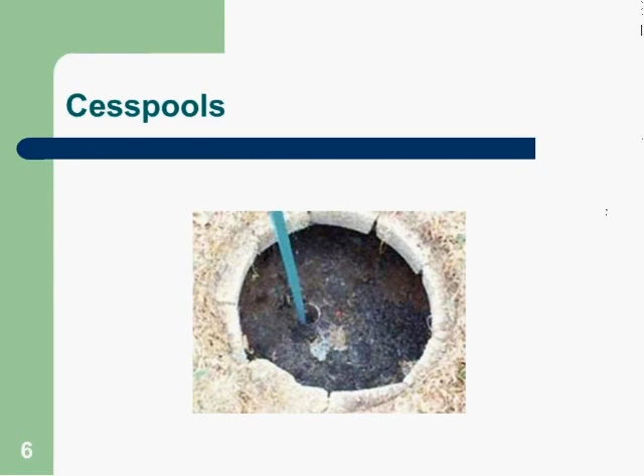First, we will discuss the cesspool issue. The rules at 3.16, Other Sanitary Sewage Disposal Units, address the cesspool issue. Cesspools are not systems. Cesspools are units that receive untreated sewage that allows a direct discharge to the environment.

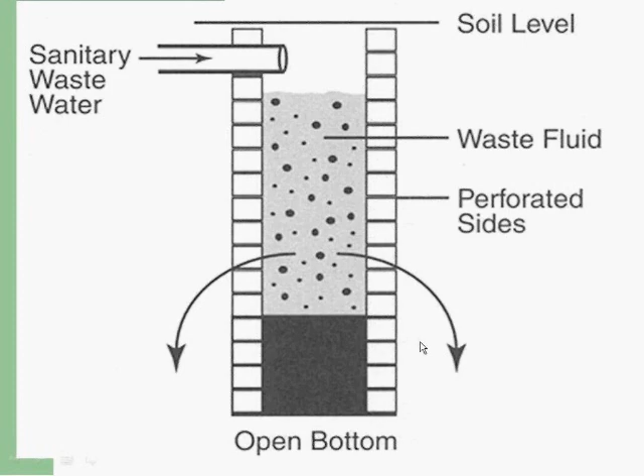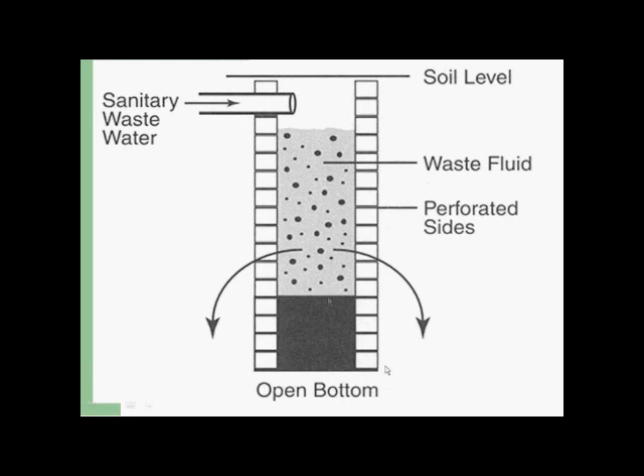Here is a picture of a cesspool for you to review. Cesspools were banned from new construction in New Jersey due to their negative impact on the environment on July 1, 1978. As you can see, the cesspool takes sewage directly from the home into a pit with open joints where the solids settle and the untreated sewage discharges into the environment.

Systems have at least primary treatment, typically a septic tank, prior to discharging. In this picture you can see there is a septic tank followed by a disposal field where water filters through the soil and then makes its way to the groundwater table.

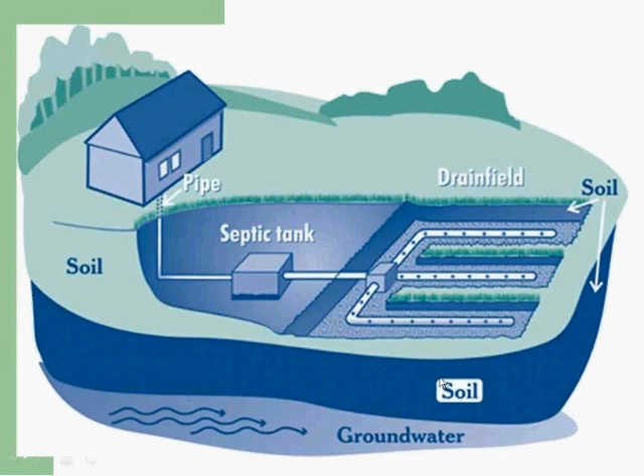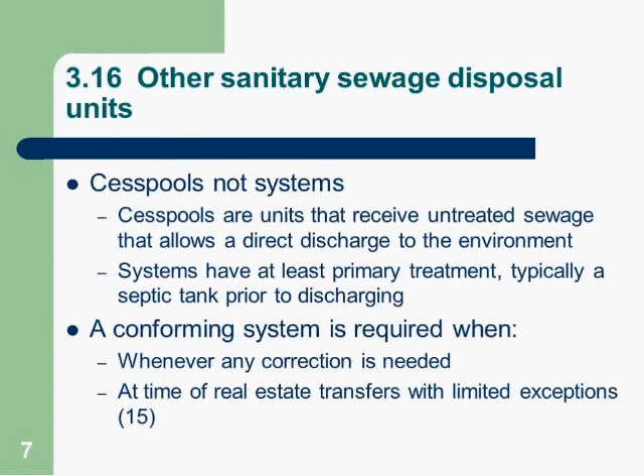A conforming system is required whenever any correction is needed to a cesspool, and at the time of real estate transfers, with limited exceptions. There are 15 of those exceptions, and we'll be discussing each one as they appear in the rule. The first is a conveyance for a consideration of less than $100.

Second, a conveyance by or to the United States of America, the state of New Jersey, or any instrumentality, agency, or subdivision thereof. A conveyance encumbering realty or providing for the modification, release, or discharge of a debt, obligation, or encumbrance, or the foreclosure of a mortgage or lien, or sheriff and execution sales.

A deed which confirms or corrects a deed previously recorded, a sale for delinquent taxes or assessments, and the foreclosure of same.

Judicial proceedings affecting interest in real estate and documents filed in connection thereto.

A conveyance by a receiver, trustee in bankruptcy, or liquidation, or assignee for the benefit of creditors; a deed eligible to be recorded as an ancient deed pursuant to the law; a deed or map that memorializes subdivisions of land.

Or which creates or affects easements or restrictions or other burdens upon title; a conveyance between family members or former spouses; execution of a lease or license; in specific performance of final judgment; a deed releasing a right of reversion.

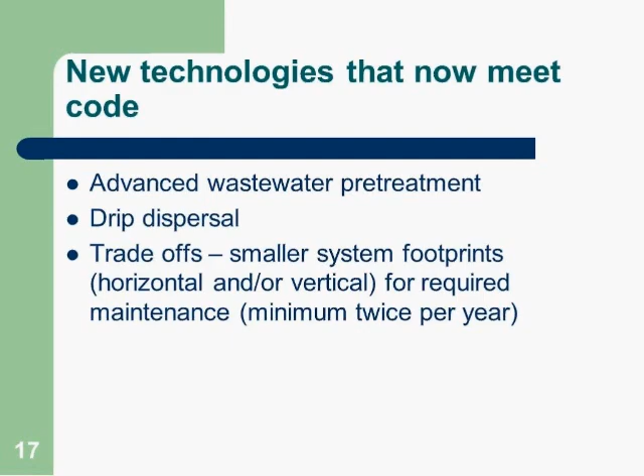However, all of these systems require maintenance at a minimum of twice per year for the first two years, and at least once annually thereafter. Depending upon the complexity of the system, more than the minimum service requirements may be required.

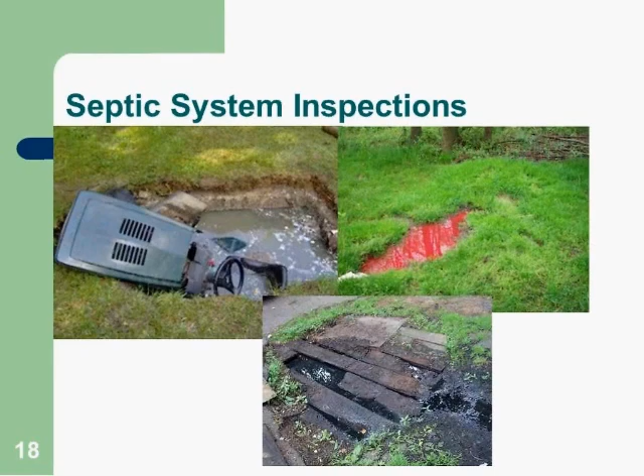The next issue we'll discuss is septic system inspections. This is addressed in 12.6 of the rule, inspections during real property transactions. These inspections are not mandatory under the rule; however, it is the state standard for doing these inspections.

As the state standard, anything else must be defendable as to why the minimum requirements of the state standard weren't met. The administrator gets a copy of every inspection. Their response is only required when a report identifies a condition listed in the Health Department reporting section on page 4 of the form. A copy of the inspection form is required to the administrative authority within 10 business days.

However, if one of those conditions on page 4, which represents a potential malfunctioning system, it must be reported within 24 hours. The protocol identifies that any problems are negotiated between parties. There is no obligation of the administrative authority, other than issuing permits required for any work done to the systems. At this point, all parties should have the information necessary to properly negotiate the transaction.

So when must an inspection follow the standard? This is required, including but not limited to, when an inspection is required by a law or rule, if a law is adopted to require the inspection of systems in the future, or if there's an existing law, such as a financing law, that requires the use of state requirements, you must follow the standard. If there is a local ordinance that's been adopted by the local Board of Health, you must follow those local ordinance requirements when you're in that jurisdiction.

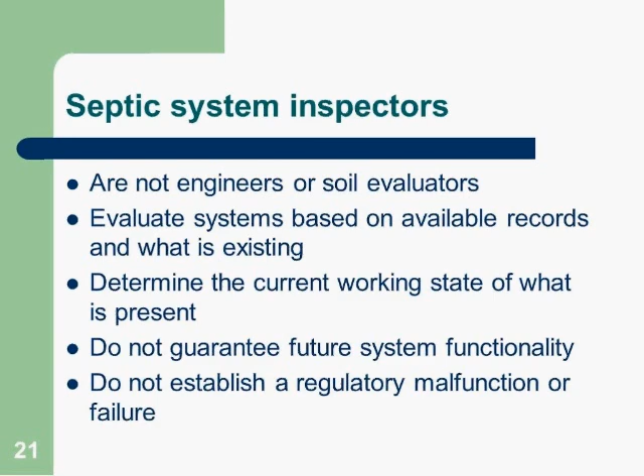The septic system inspection protocol has existed since 2003. The protocol has been published guidance in New Jersey, but is based upon a Pennsylvania Septic Management Association inspection criteria that was established in 1989. It is a professional standard recognized by the state.

If it doesn't follow the minimum requirements of the protocol, it is not an inspection as defined by New Jersey rule.

New Jersey One Call is New Jersey law. It protects the utility, the water, the phone, and the cable systems, and human health from accidental electrocution or gas line explosions and other hazards associated with working around subsurface utilities. That is why New Jersey One Call is required.

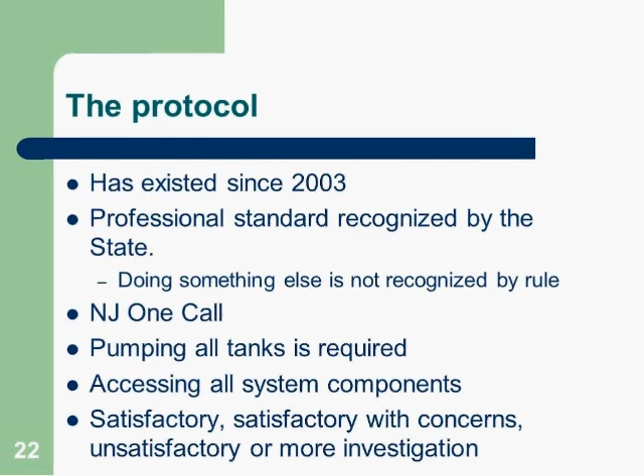Pumping all tanks is required as part of every inspection. You cannot inspect a tank below the liquid level without pumping. For example, here is a picture of a septic tank. There is no way for someone to see beneath the scum, the wastewater level, or to the sludge to determine if the bottom of the tank has been compromised or cracked, or the sidewalls below those liquid levels, without pumping those tanks first.

The protocol is in Appendix E. Specifically, Condition 4J requires all tanks be pumped in order to consider the inspection complete. However, when the tanks get pumped depends upon observations at the time of the inspections. In some conditions, you don't pump the tanks right away so that others may observe the problems associated with the tank.

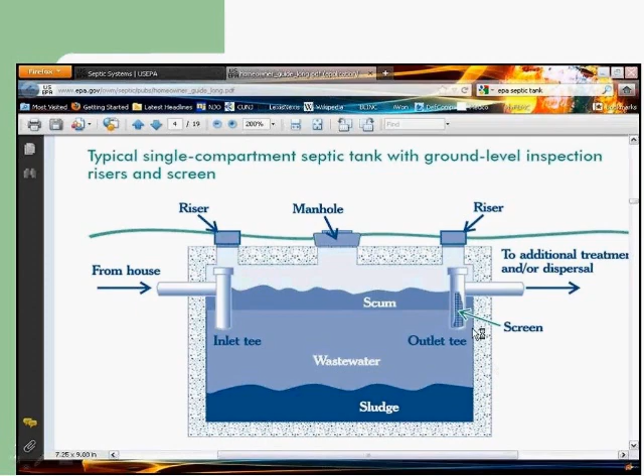So what is the health department role during these inspections? They are there to receive copies of all inspection reports. Again, this is required by the standard. Any report of a problem identified on page 4 of the inspection report results in the same response as they would any other report of a potential malfunction.

That does not mean they must visit the site. They follow their standard operating procedures, how they would if they received a phone call or a complaint from a neighbor regarding a potentially malfunctioning system.

Any repair or alteration to the system must be properly permitted by the administrative authority. You cannot do any work to a system without a permit. If a malfunction is confirmed by the administrative authority, the system must be repaired or altered.

A conforming system upgrade is required if it is possible. If documented that no conforming system is possible, the authority may allow a non-conforming upgrade. If no reasonable system is possible, holding tanks are required.

Malfunctions that are identified by these inspections include ponding or breakout of sewage or effluent on the ground surface, sewage or effluent seeping into buildings, backup of sewage into the building that is not a physical blockage of the plumbing, or leakage of watertight system components such as the septic tank or a distribution box or a pump tank.

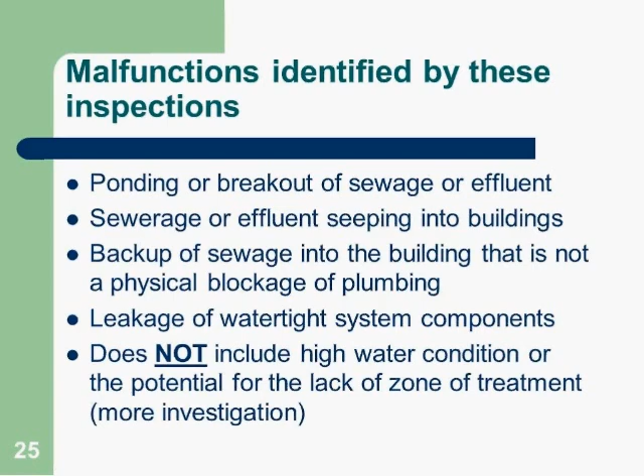That concludes our presentation. Now we will address the questions that were previously submitted to the New Jersey Association of Realtors and given to the department ahead of time to address.

Question 1: How can the property owner comply with the new requirement to upgrade from cesspools where a prohibition exists in other laws or regulations, such as in the Highlands or Pinelands, or in close proximity to C1 waterways? Question 1 and question 2 have a very similar answer. Question 2: Is there an exemption for historical properties, such as those over 100 years old, located in environmentally sensitive areas? For example, how do you upgrade a cesspool where the DEP's own regulations prohibit any soil disturbance?

In response to questions 1 and 2, the department rules have exemptions or methods of permitting the upgrading of on-site wastewater disposal systems, especially when dealing with a repair or alteration to correct an existing malfunctioning system or upgrading a cesspool. Expansion of flow would be prohibited, and changes of use may be severely limited. However, continued use of an existing structure is often allowable.

This may require the use of alternative or advanced treatment technologies that can be located inside structures to minimize soil disturbance outside. Drip dispersal systems, where there is no fill brought onto the site, are often options in these cases. A holding tank is the least desired and last option we consider.

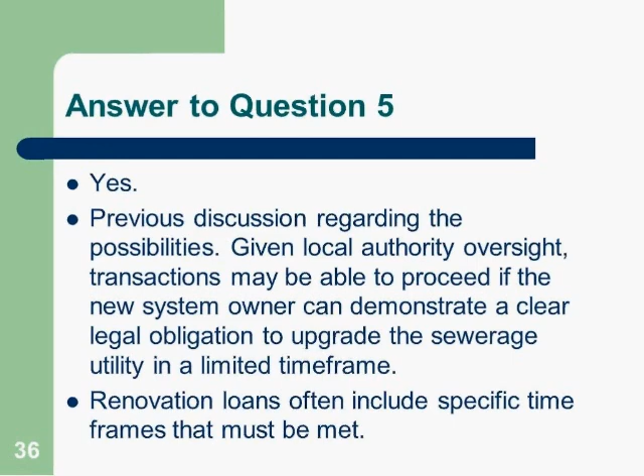Question 6: Regarding foreclosures and short sales within the state, if a passing septic system inspection cannot be obtained for mortgages, are the banks planning on cooperating with state-mandated repairs? Do we have a system in place to demonstrate to the banks the need for their cooperation?

Corrections are only mandated when there is a regulatory malfunction or if there is a cesspool. Unsatisfactory conditions or concerns beyond a regulatory malfunction are subject to negotiation between buyer and seller. With a regulatory compliant inspection, the parties will have all the information necessary to properly negotiate the transaction. Again, this is similar to a 15-year roof on a 17-year-old house.

There is no system in place with the banks. As before, they decide what to finance and what not to finance. The department has no control over that issue.

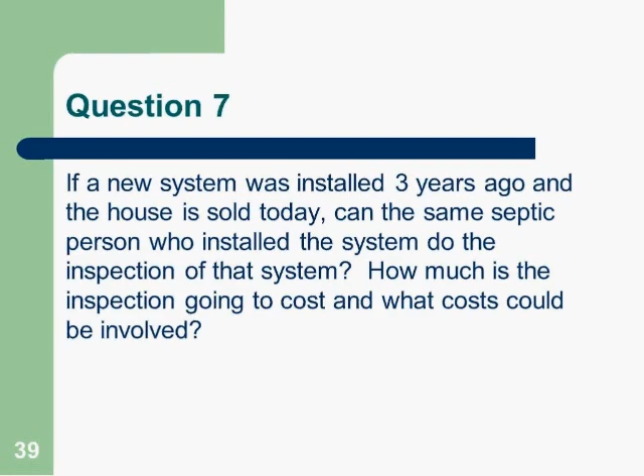Question 7: If a new system was installed 3 years ago and the house is sold today, can the same septic person who installed the system do the inspection of that system? How much is the inspection going to cost, and what costs could be involved?

Well, the rules do not identify or limit who can do the inspection of a septic system. But the client would have to identify for themselves if there is a conflict of interest concern.

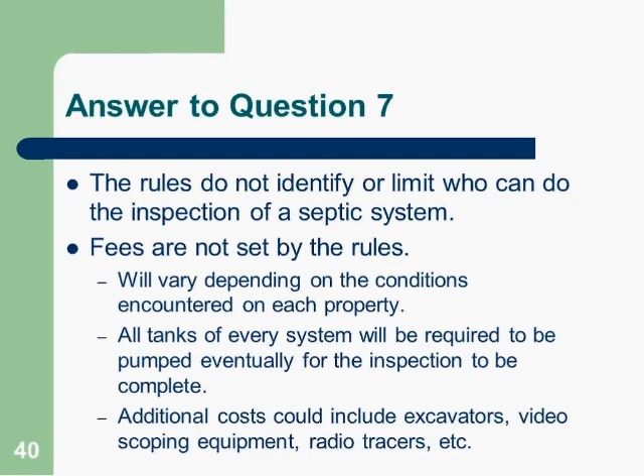Fees are also not set by the rules. This will vary depending upon the conditions encountered on each property. All tanks of every system will be required to be pumped eventually for the inspection to be complete. Additional costs could include excavators, video scoping equipment, radio tracers, or any other specialized equipment needed to access or inspect the system components that are present on the site.

Question 8. Are there different sets of criteria for inspections based upon the age of the property? For example, one that was constructed 10 years ago as opposed to a property constructed 30 years ago. There is only one protocol for system inspections in the rule. However, the protocol includes a methodology that encompasses systems dating back to 1954, which is the first law adopted regarding on-site systems in the state. It will also address many systems even predating that, depending upon what is involved with the components that are present on the site.

Question 9. Are the requirements in this regulation for the upgrades or septic inspections the same for different types of properties - residential versus commercial, industrial, or farm properties? That's a really broad question. System inspections from a baseline perspective are generally the same, but based upon what exists on the specific property. Requirements for upgrades are based upon the sanitary nature of the wastewater, except for food service, which, for example, must incorporate grease removal and high-strength wastewater pretreatment in accordance with the rules. Non-sanitary discharges, such as industrial waste, are prohibited unless an NJPDES permit, which is a state operating permit, authorizes that discharge specifically.

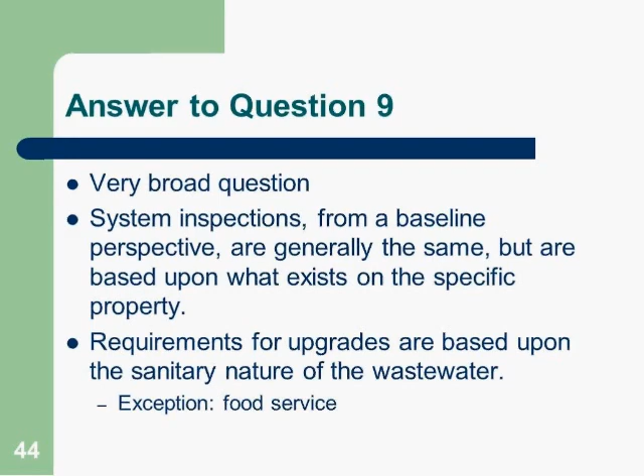Question 10. If a local authority determines that a conforming system can be installed on a property, and the property owner does not agree, is there an appeal process where the decision can be challenged either to the county or a state entity? That's a very legal question, and I'm going to provide the legal response, which is appeals to determinations made by local health departments must be made directly to the local Board of Health having jurisdiction. Appeals of Board of Health decisions must go to a court of competent jurisdiction.

Question 11. Can there be more stringent requirements locally? The answer is yes. The rules do allow local administrative authorities to adopt more stringent ordinances. The locals can also interpret the rules, and the rules are a minimum requirement.

Question 12. Will the rules affect commercial properties, and if so, how? The rules apply to any non-single-family residential application with estimated volume of sanitary sewage less than 2,000 gallons per day, in addition to the single-family residential properties. So they affect those commercial properties equally. However, if you cannot comply as a commercial property with the rules at 7:9a, you are required to obtain a state operating permit under the N.J.A.C rules, which are 7:14a. We did discuss this in a previous question.